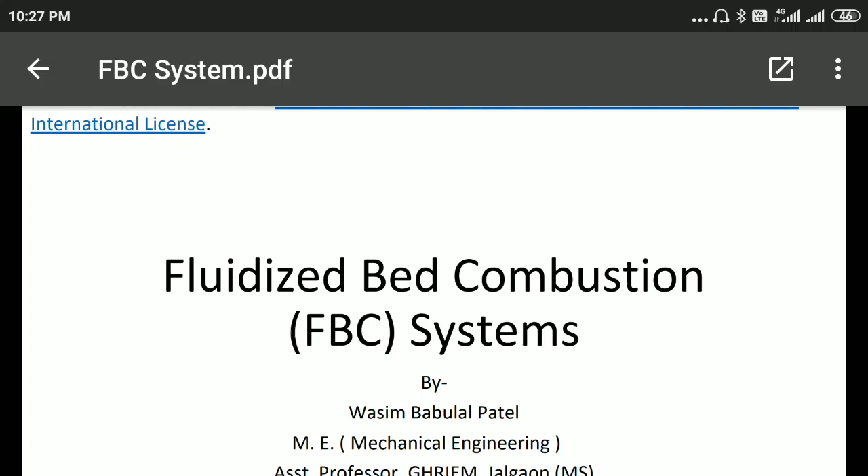Hello friends, today we will study about the fluidized bed combustion.

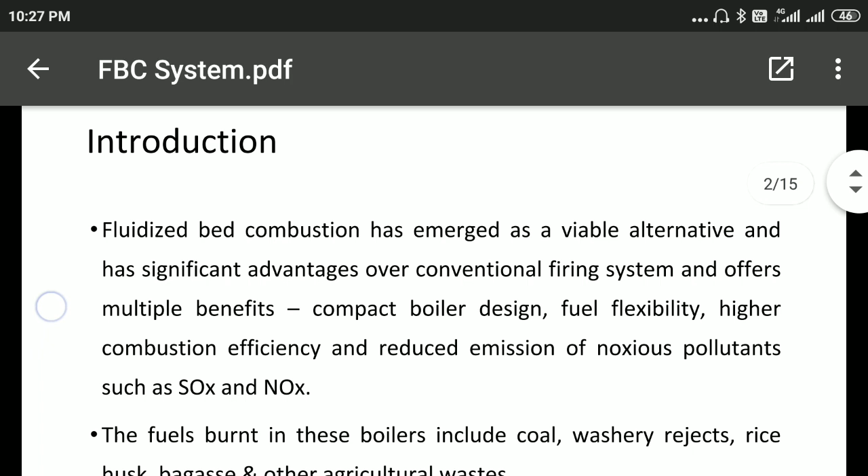So what is an FBC system? It has emerged as a viable alternative and has significant advantages over the conventional firing system, which normally we are going to use in a normal furnace; coal firing is the conventional system. Using an FBC system offers multiple benefits: a compact boiler size, fuel use flexibility, and higher combustion efficiency, which is the important one.

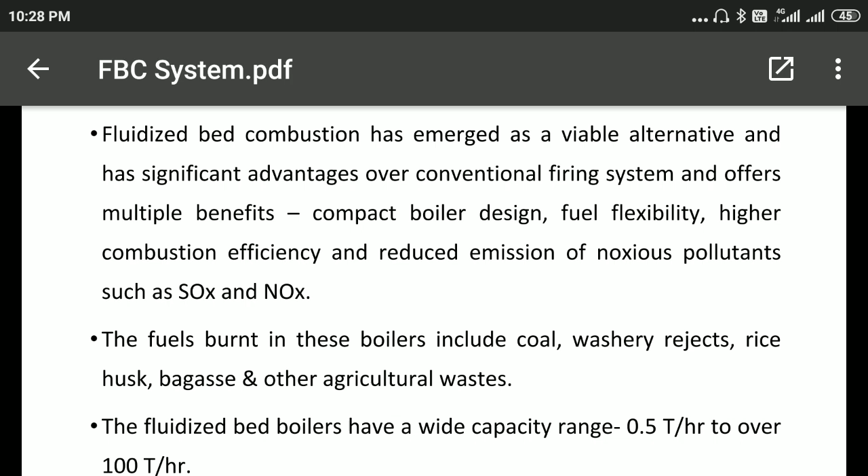Combustion efficiency increases due to use of the FBC system, and it reduces the emission of noxious pollutants such as SOx and NOx. It reduces the sulfur oxides and nitrogen oxides, which are harmful when combined with the steam in liquid state. So it reduces the possibilities of NOx and SOx.

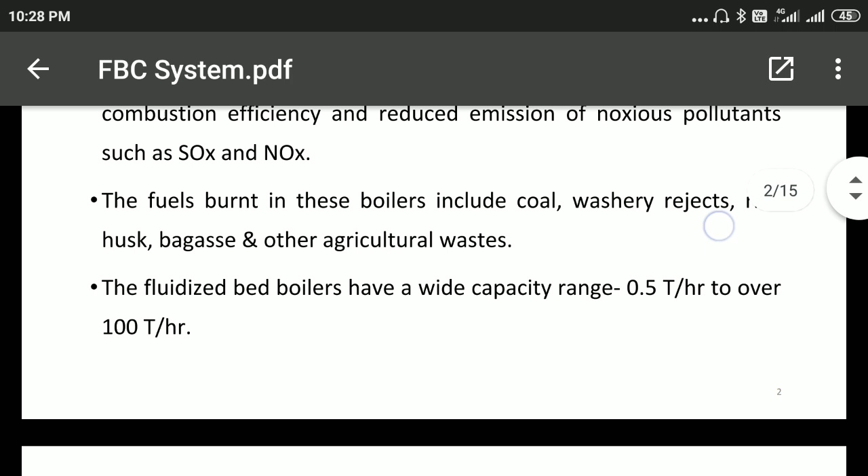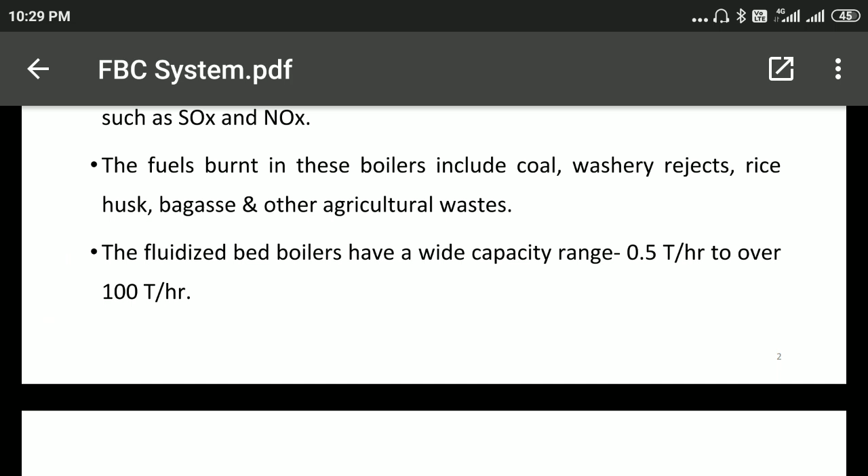The fuels burnt include washery rejects, rice husk, bagasse and other agricultural waste, depending on which type of fuel we are going to use in the boiler. Fluidized bed boilers have a wide capacity range of 0.5 tons per hour to over 100 tons per hour. So why do we need this FBC system?

Because we know that the limited sources of oil and gas, as well as their price, led to the need for an alternative fuel, where coal can be used as a fuel, given the limited sources of the other fuels. Coal is available in abundance in India, therefore we need an FBC system.

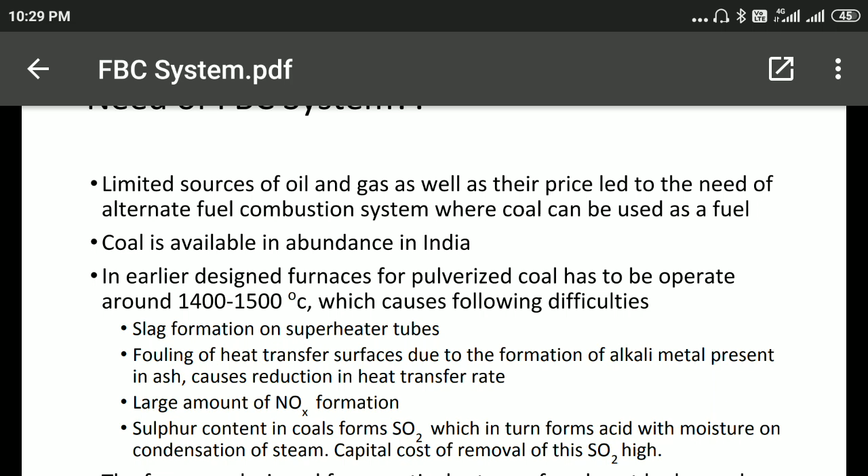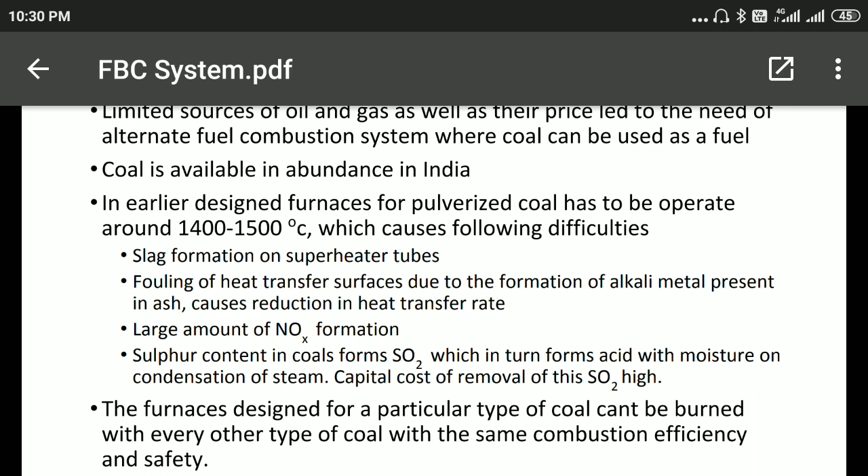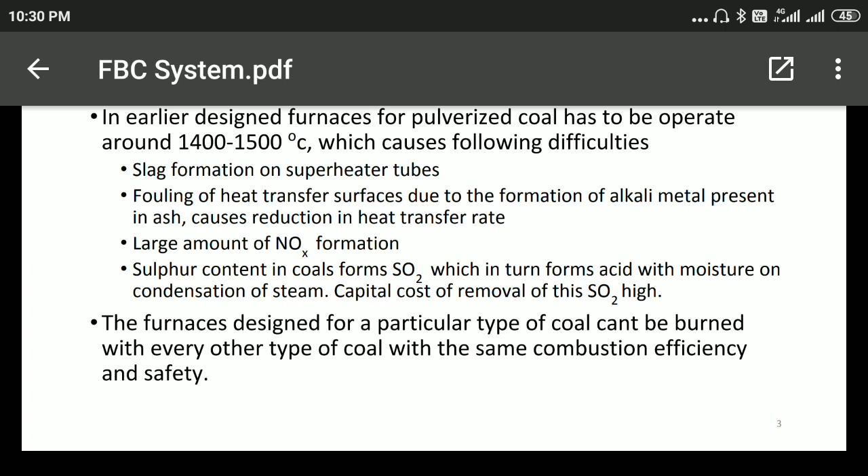Earlier, furnaces designed for pulverized coal had to be operated around 1400 to 1500 degrees Celsius. Using pulverized coal without an FBC system at 1400 to 1500 has the following difficulties: slag formation, a large amount of NOx formation, and SOx formation, SO2 sulfur dioxide, which in turn forms acid with the moisture on condensation of steam. If it mixes with the moisture it forms acids, and the capital cost for SO2 removal is very high in the conventional type.

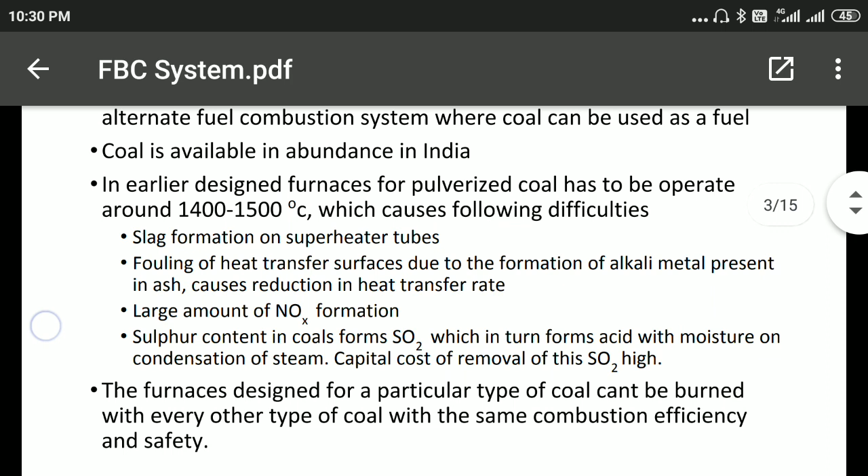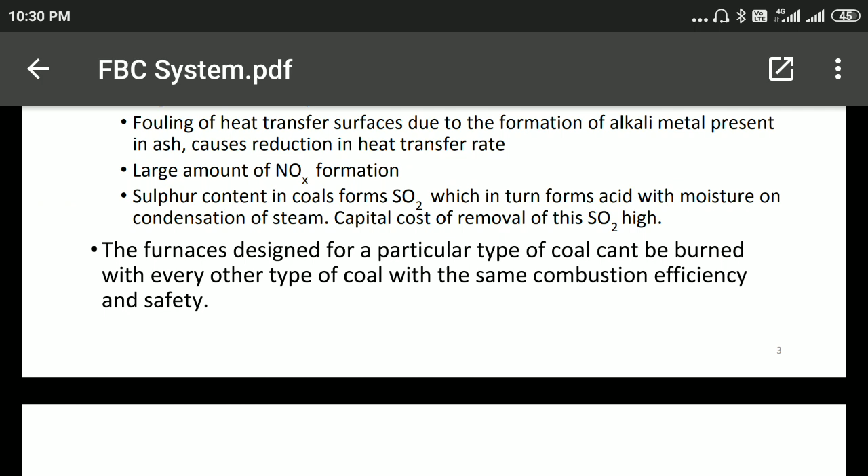But if we use the FBC system, the boiler is operated at 800 to 900 degrees, which is sufficient temperature for the combustion. So a furnace designed for a particular type of coal can burn every other type of coal at the same combustion efficiency and safety. Various types of coal can be used for the burning.

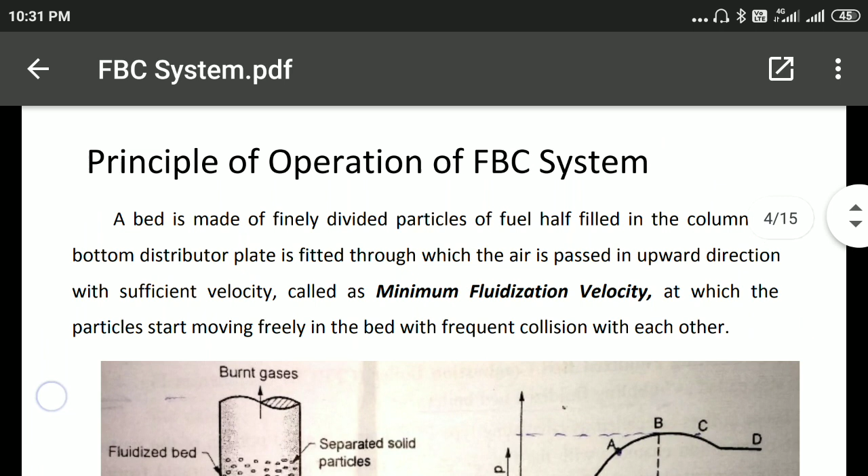The bed is made of finely divided particles of fuel half filled in the column. At the bottom a distributor plate is fitted, and air passes in the upward direction at sufficient velocity. We have to increase the air velocity if we want to convert the normal bed into a fluidized bed, and that velocity is called the minimum fluidization velocity.

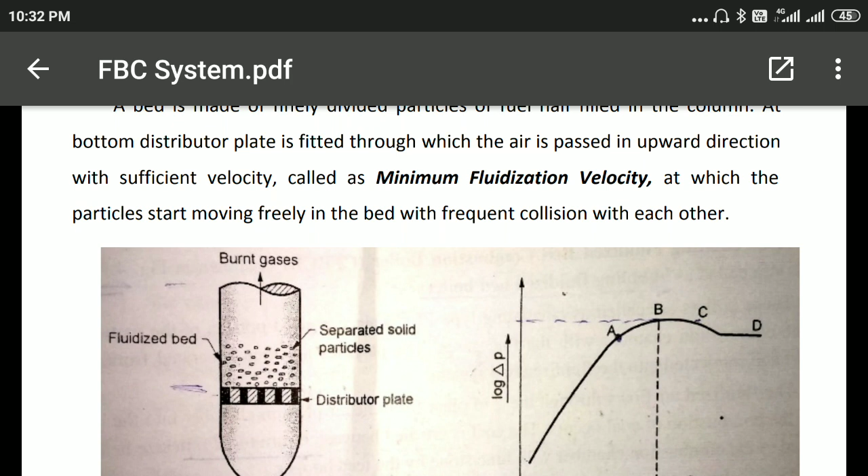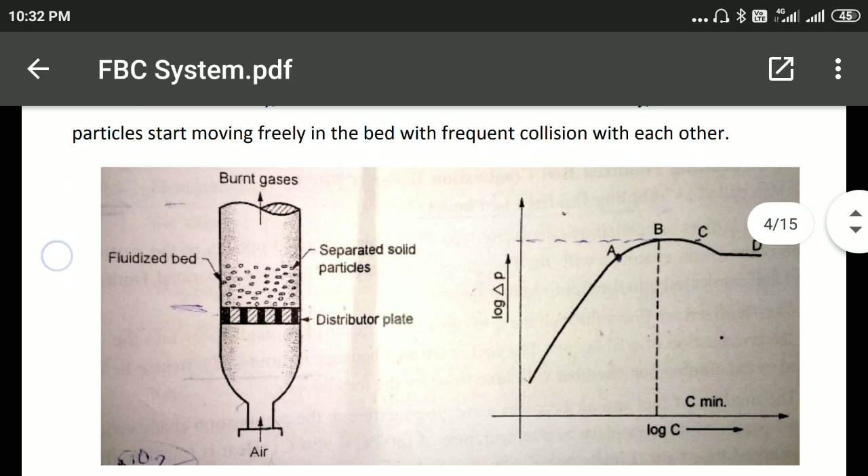It is the velocity at which the particles behave like a fluid, since a fluid has the property to flow. That velocity is called the fluidization velocity, at which particles start moving freely in the bed with frequent collisions with each other. Because they are closely placed on the bed, when they move freely they collide with each other. That is the concept we utilize, and because of this the combustion takes place.

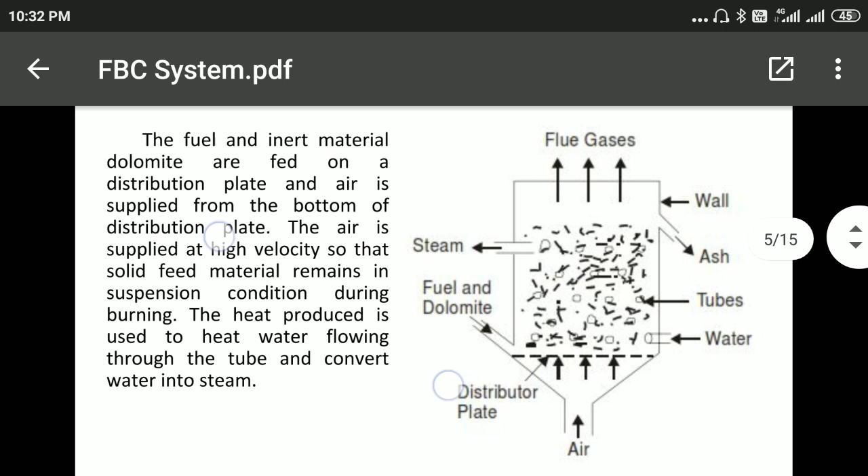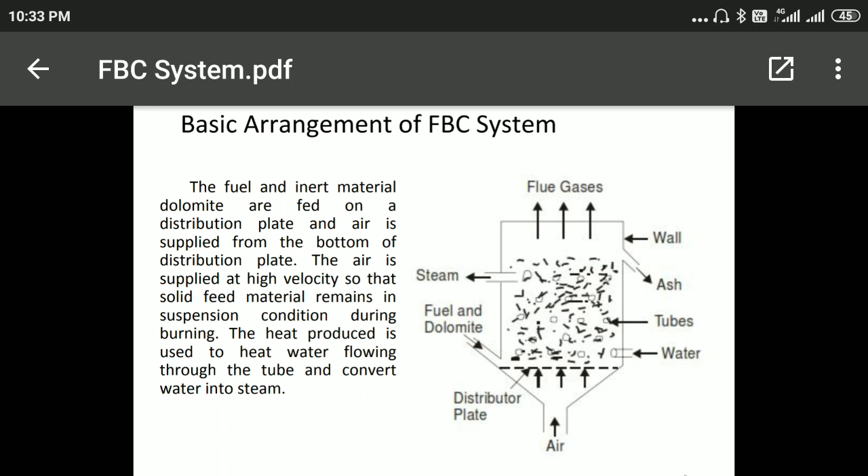The basic arrangement is given here. Here we can see the basic diagram of a normal FBC system. There is the distributor plate, the air, and water tubes through which water is supplied, which we convert to steam. There is an ash removal system, flue gases, and an inlet for the fuel and dolomite. The fuel and inert material dolomite are fed on the distribution plate, and air is supplied from the bottom of the distribution plate. Its basic function is given here.

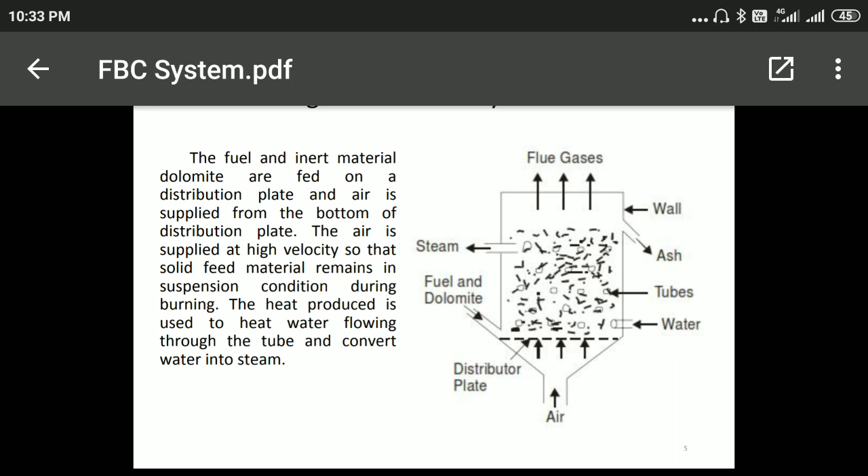The air is supplied at high velocity, which, as we said earlier, is the fluidization velocity, so that the solid feed material remains in suspension during burning. By this velocity the solid particles, burning coal and dolomite, are in suspension, meaning in moving positions. The heat produced is used to heat the water flowing through the tubes and convert the water into steam.

So basically the dolomite's function is to help the particles move freely within the furnace, and its second most important function is to restrict sulfur dioxide or sulfur particles moving out with the furnace gases, because sulfur carries a large amount of heat. Therefore there is a sufficient temperature of 800 to 900 degrees for complete combustion.

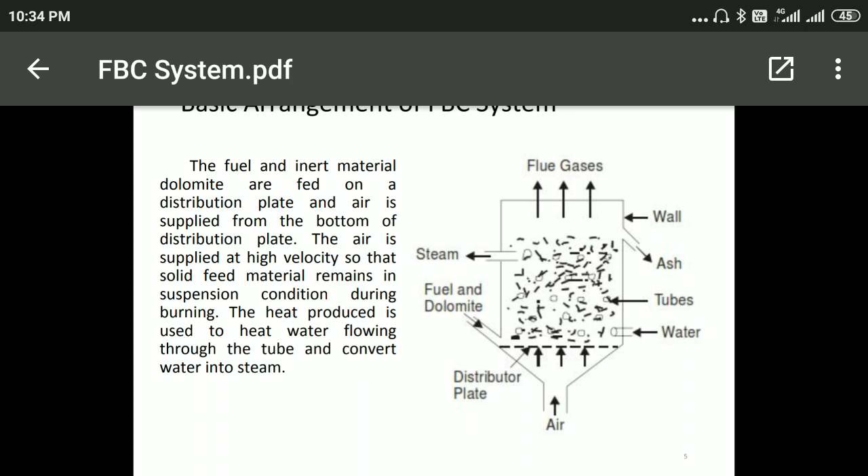So if we see the advantages, in an FBC system even low grade fuel can be used, including municipal waste, and therefore it is a cheaper method for power generation. We don't require high grade fuel. As far as coal is concerned, peat, lignite and bituminous coal can be used. It is easier to control the amount of SO2 and NOx formed during burning.

Low emission of SOx and NOx helps in controlling the undesirable effects of SO2 and NO. During combustion, SO2 emission is nearly 15% of that in the conventional firing method. Means in the FBC system the SOx emission is only about 15% compared to conventional, normal beds. There is a saving of about 10% in operating cost and 15% in capital cost of the power plant.

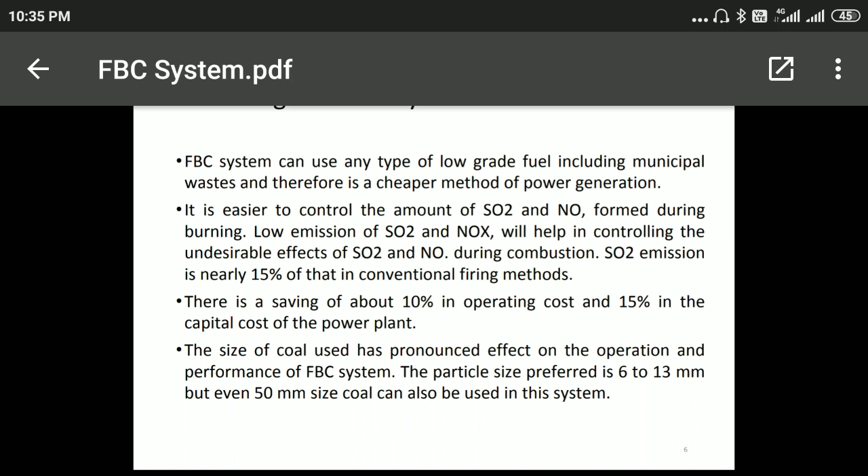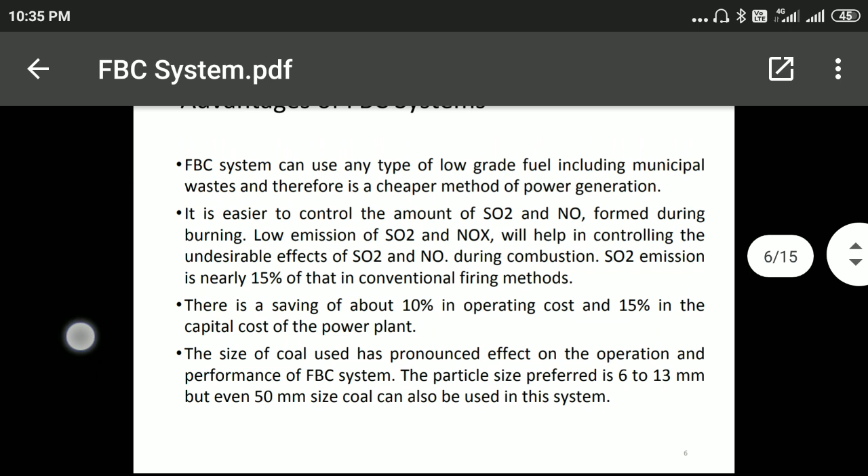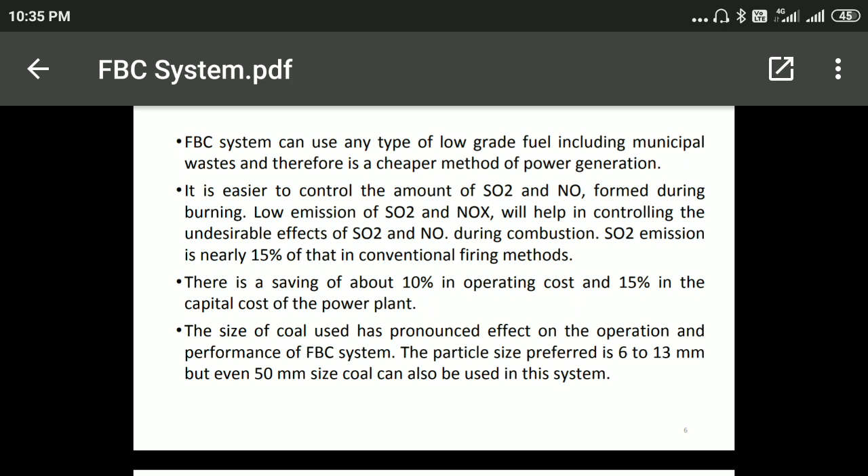So as far as the financial condition is concerned, this saves 10% and 15%, because capital cost is concerned with the construction of the boiler and all that, and operating cost relates to the use of fuel. The size of the coal has a pronounced effect; the particle size is preferred to be between 6 and 13 mm, but 50 mm can also be used in this system.

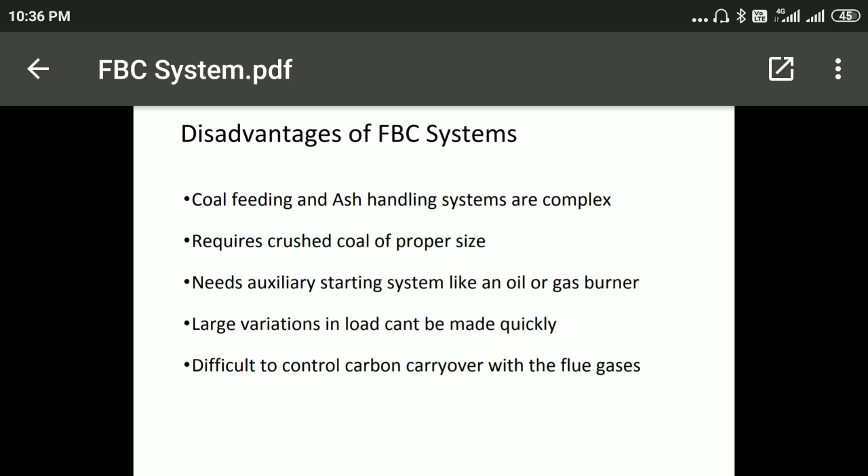If we consider the disadvantages, the ash handling system is complex, and it requires crushed coal of proper size for the moving purpose. Large load variations cannot be made quickly, meaning if a load variation is required, we cannot make it quickly in the FBC system.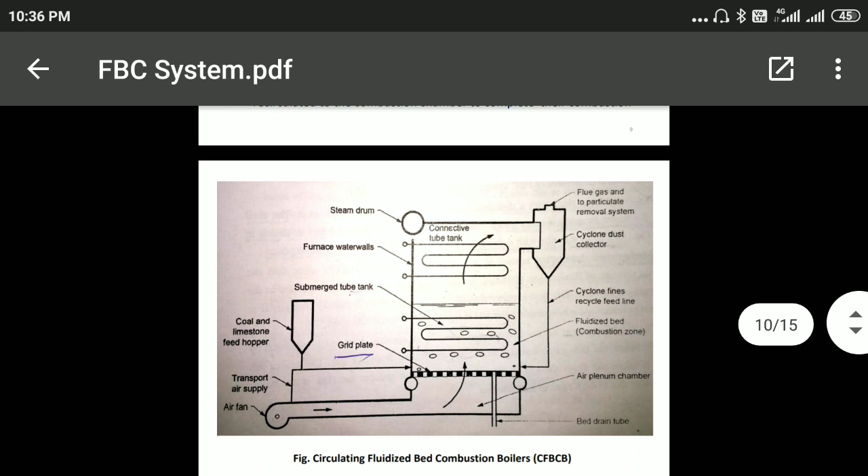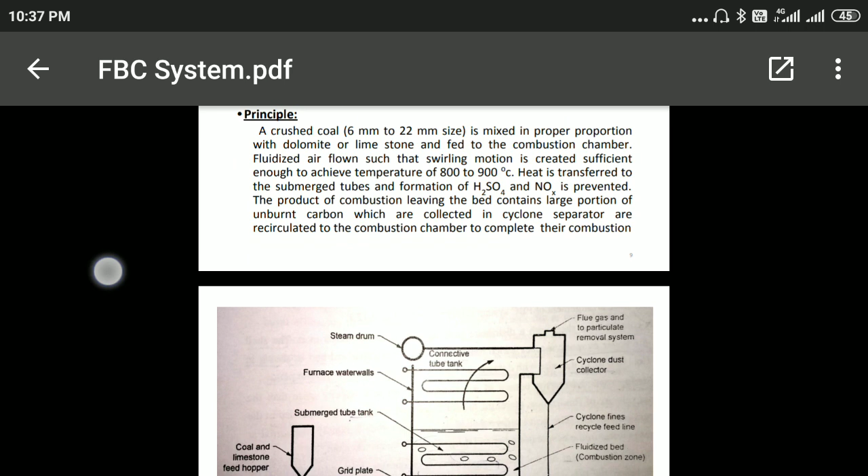So the crushed coal, 6 mm to 20 or 22 mm in size, mixed in proportion with dolomite or limestone, is fed into the combustion chamber. Fluidizing air is blown so that a swirling motion is created, sufficient to achieve a furnace temperature of 800 to 900 degrees. Heat is transferred to the submerged tubes, and formation of H2SO4, sulfur dioxide, hydrogen sulfide and NOx is prevented. So heat is transferred to the tubes in which steam is created.

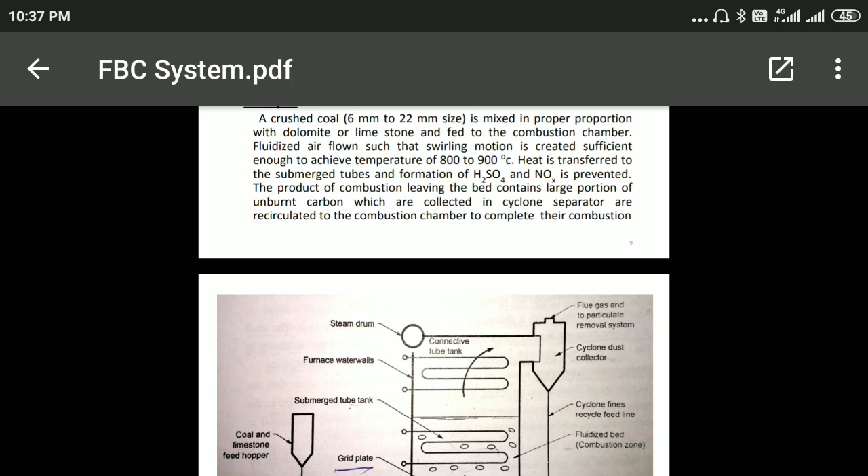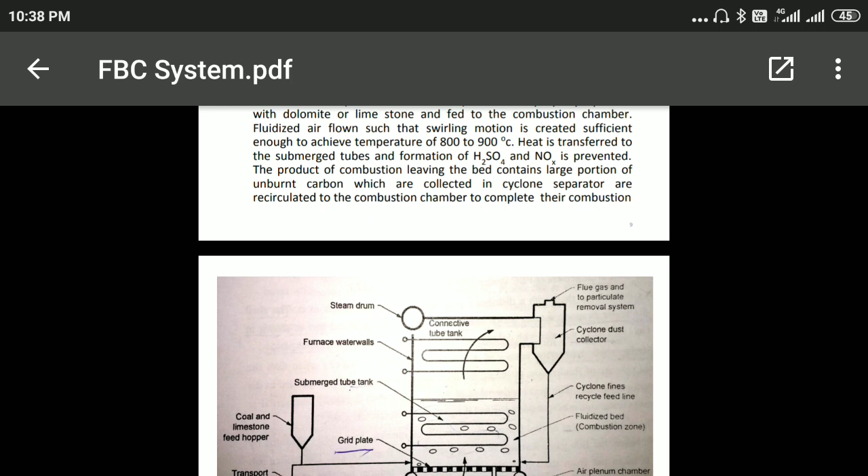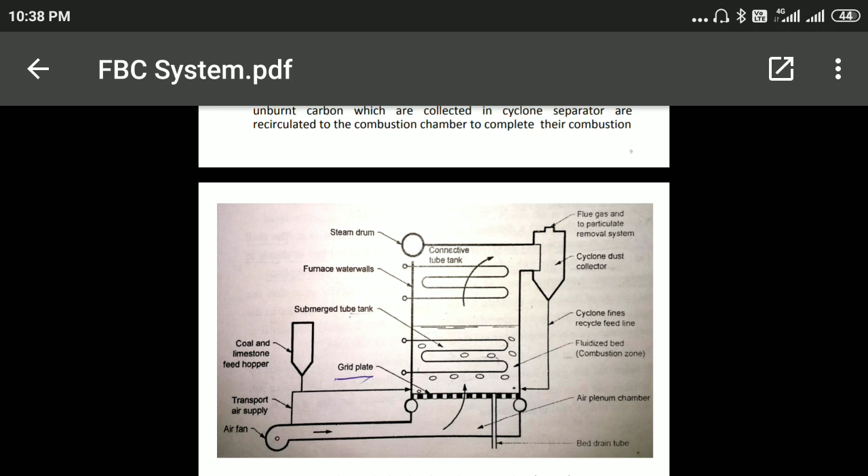The products of combustion leaving the bed contain a large portion of unburned carbon and dolomite particles. Means the flue gases carry fuel particles, unburned carbon and dolomite particles. These are collected in the cyclone separator, provided at the corner of the furnace, which separates the particles from the flue gases and recirculates them to the bottom of the bed, above the distributor plates, for complete combustion of these particles.

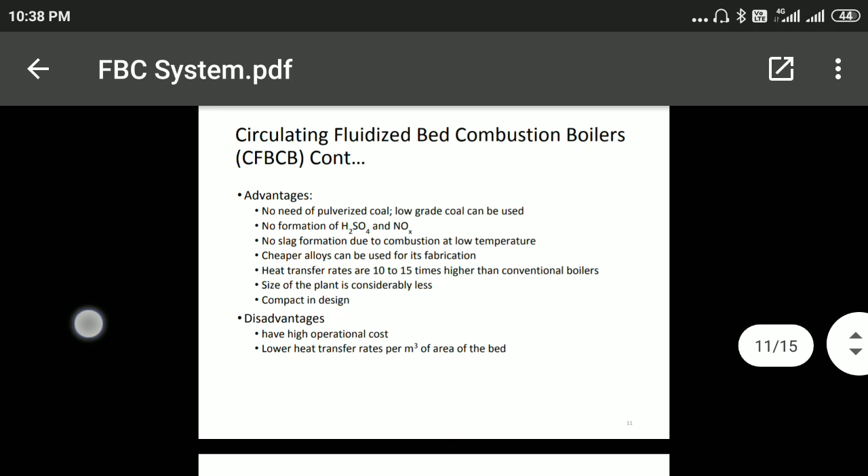So for the circulating type, the advantages: no formation of H2SO4 and NOx, no need of pulverized coal, cheaper alloys can be used, compact design, all the same as the FBC system. The disadvantages are high operating cost and lower heat transfer rate per cubic meter of bed. Means if the volume of the bed increases, the heat transfer rate decreases in the circulating type of fluidized bed combustion.